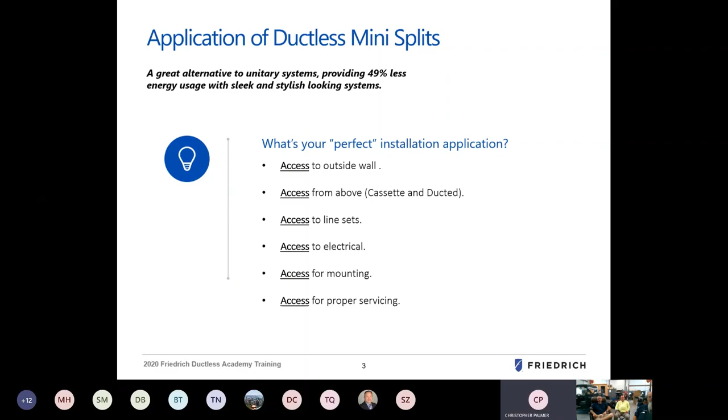Access and serviceability definitely matters. We all know from being in the field that things can add up to unforeseen costs, unforeseen service-related issues, and performance-related issues. All of that makes a difference.

So when you're planning your installation, make sure to have a good conversation with the customer about the expectations of the equipment, the understanding of what the customer is trying to accomplish with their cooling and heating needs, and the overall look and feel of the installation, plus future serviceability and maintenance.

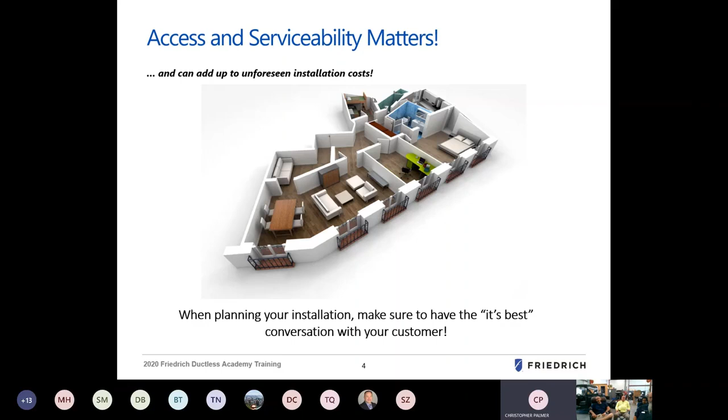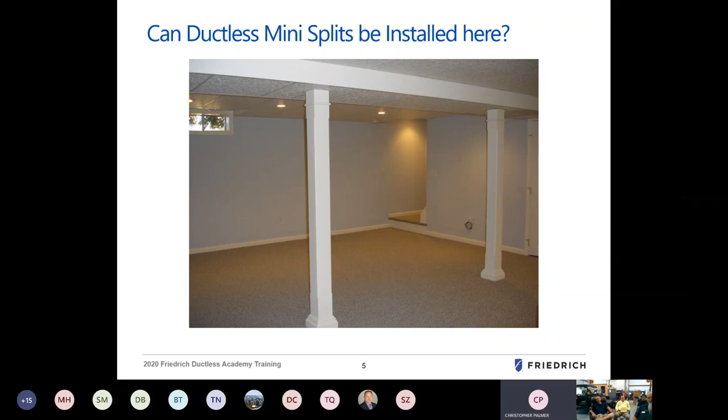Can ductless mini splits be installed here? This is a basement picture, finished room, trying to figure out what the best installation practice would be, and the best equipment to offer this customer. There may be a variety of different installation issues that come up from time to time and would be necessary to plan for this project appropriately.

System design is critical. Design is defined as the process of engineering an HVAC system. The ductless equipment is heavily focused on load calculations and equipment selection. So make sure that when you're looking at a project to design your ductless installation, all concepts from system concept, load calculations, Manual J, proper equipment selection, installing and using proper techniques with installation equipment, and adjusting, testing, and balancing are considered.

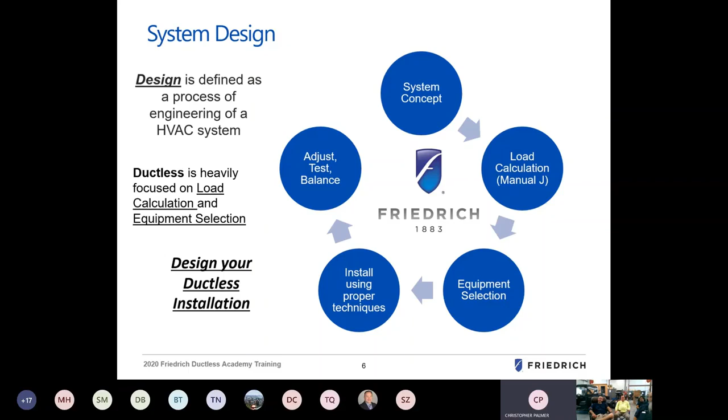Yes, there are some truths behind sizing charts. They're not just pretty pictures in a book. Similar design and build concepts apply - you're not going to build a 20-story building without properly engineering the building first and using the proper materials. Similar window design, window sizing and placement, similar insulation, if any, and similar layout. All of these concepts hold true today.

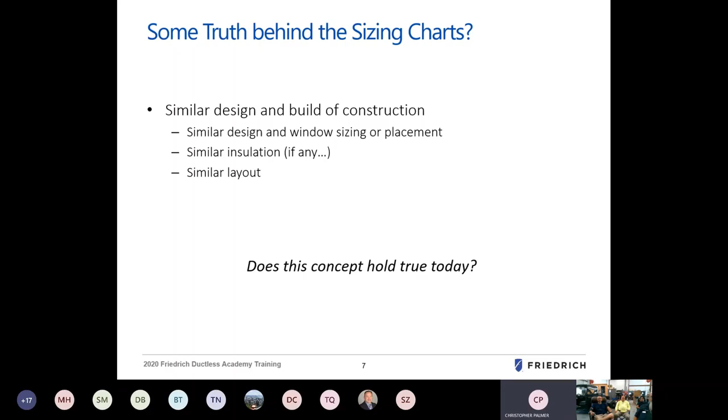ACCA Manual J - the importance of completing a Manual J is to determine the heat gain and heat loss of your specific application. No two applications are exactly the same, which is so true. Window panes, even the ratings over time, break down.

Calculations of the R value of the wall factor - a customer might have had a tree in their yard for 20 years, and all of a sudden a storm comes along and takes it down, and it changes the whole calibration of how the house is engineered now. They had that shaded covering for 20 years that actually did provide some cooling naturally from the environment, and now they don't have that, so their heat load goes way up.

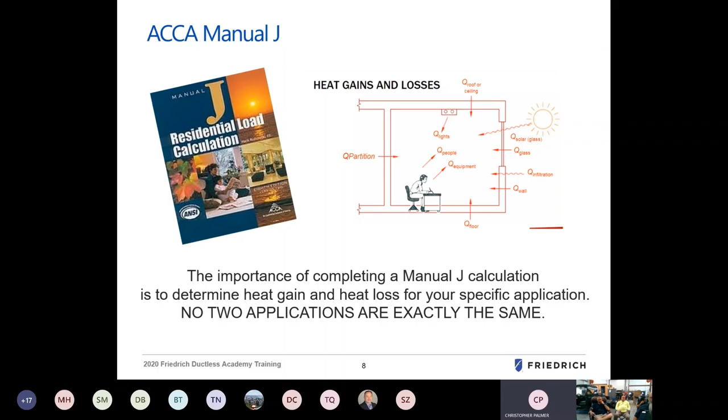So it's definitely important to do your proper calculations to determine your equipment sizing.

Clearance for Pro and Premier: we have a 5-inch clearance from the top of the unit with a 78-inch clearance from the bottom of the chassis once it's mounted on the wall. We're also looking for approximately 2 inches left to right from any obstructions, corner inlets, doorway openings, etc. And then 60 inches to the front, so that you're not putting this in some kind of nook and cranny and expecting the air to make its way around it.

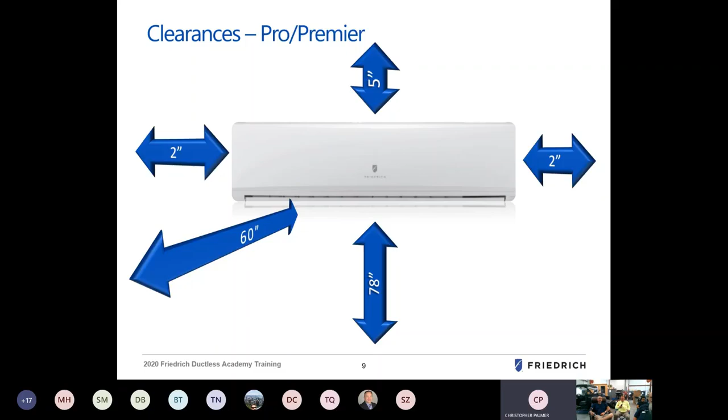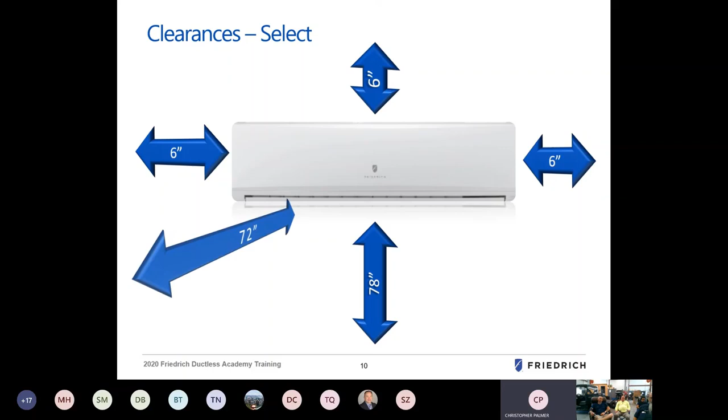Clearances again on the Select product would be 6 inches from the top, 78 inches from the bottom, 6 inches from either side, and then 72 inches to the front. You need a little bit more clearance on this particular model.

For example, wall penetrations - this is important. How often have we made it where the line set doesn't line up, or we have issues with the drain line? Making sure that the unit is properly pitched. So what we want to do is when you're drilling your holes, drill from inside to out. Once you get through the drywall or whatever wall surface material you have, if you drop your arbor down or angle your bit down, you should be able to create that nice slope to make sure that there's gravity feed on your condensate.

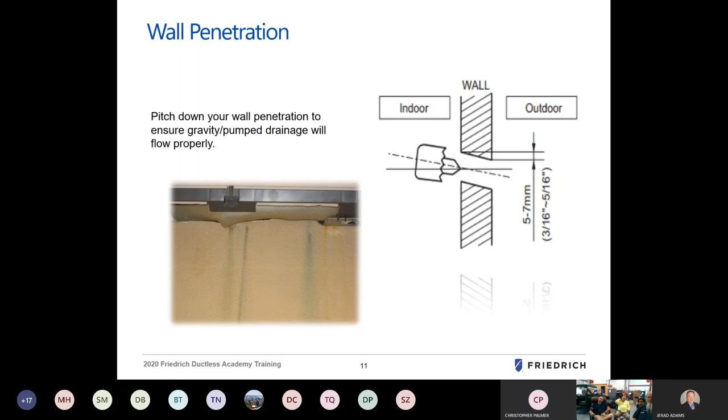You need clearances there to gain for service. Plus, you want to make sure that you're not blocking the discharge air coming off of the condensing portion. Shrubbery and things like that also does take into account restrictions. So we want to be mindful of the front space clearances, as that sometimes is important and overlooked in settings of specific application.

Clearances of select product: 20 inches to the top, 12 to the side, and more than 72 to the front end. Obviously, the more space around the equipment you can provide, the better off it is for you to make it easier for you to access it personally. You may not be the technician going back to service it, but you know that you stand a fighting chance that if you have room enough to work on it, any future service would be taken care of appropriately.

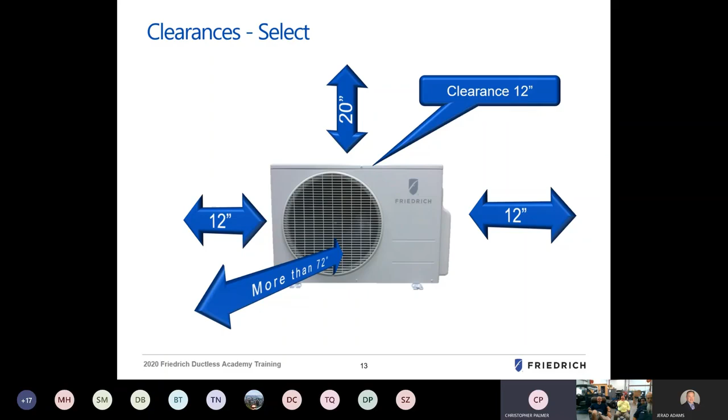Some of the tools of the trade. Essential tools for ductless installation. The big one is an orbital flaring tool.

Making key flares is critical in keeping the system charged properly, keeping contaminants out of the system, and making sure your line sets are connected appropriately. Often overlooked is the torque wrench, to make sure that the flare nuts are properly connected at those points of contact and that we have good, clean connections.

Deburring tool - some guys use a razor knife, some guys use a pocket knife, whatever. But a deburring tool makes sure the copper tubing is clean when we make those flares.

Vacuum pump, 2-stage or other appropriate vacuum pump, good for pulling down a vacuum, making sure that the system is clean before we charge the refrigerant. Micron gauge, once again, as a refrigeration tool, making sure that we have a good, clean circuit refrigeration system and that the system is as clean and as free of contaminants as possible.

And a good manifold gauge, whether you use a digital gauge or the standard analog type, making sure that you have good, clean hoses and that you're not contaminating the potential system with any undue components.

And then a digital refrigerant scale. Fish scale, bathroom scale, all of that stuff should be out the window by now in the conversation - to properly charge, add refrigerant, and remove refrigerant from a system, you need a nice, good working scale to make sure that those charges and refrigerant measurements are accurate.

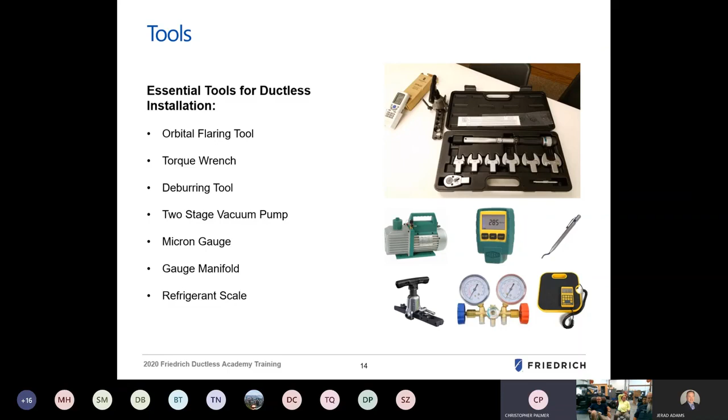Line sets - making sure that both line sets... some guys will run their own line sets, so they'll get strips of rolls of copper and then they'll get the bare Armaflex or insulation and make up their own. That's a fine practice. Sets are often purchased with equipment already pre-done up for you.

The idea here is that you want to make your own flares to verify that you make good, clean connections. How oftentimes in the field have we purchased a pre-flared line set from a supplier and got to the job site and the flares or the copper was a little thin and the flare didn't hold, or it just didn't meet your specific specifications. So it's a nice thing to do to get your line set ready and make your own flares to make sure that you feel good about the connections you've made.

The power and communication wire - this is always a debatable idea about what wire I can use. In our literature, we recommend 600 volt rated wire, 14 gauge, 4-wire. That's 3 conductors and 1 ground. Do not intend to use the ground wire as one of your communication legs or power legs. That is so often a mistake.

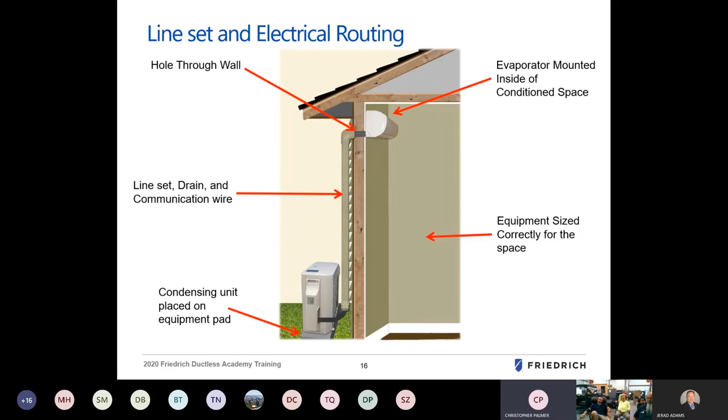Making sure that both copper lines are insulated. If you haven't insulated the refrigeration lines correctly, you might get some sweating. Sweating might lead to biological growth or discoloration of the wall, or some other leaking inside the sheetrock, and could create other building system issues. So make sure those lines are nicely neat, clean, and insulated.

And also make sure you can run the communication wire along with the line set, and that doesn't have to be run separately.

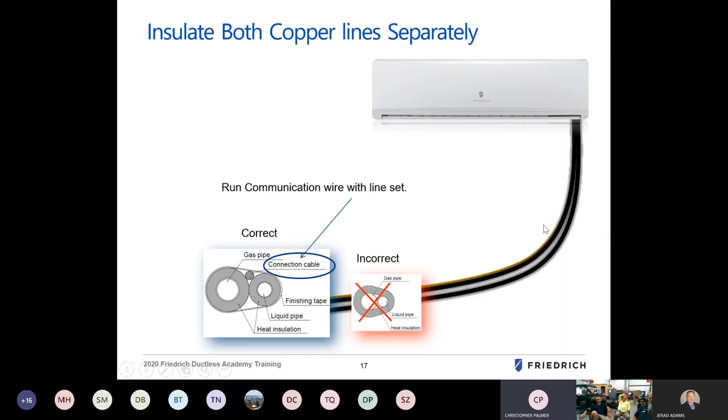Evaluating the length of line on the fittings, yes, 90s and bends do create extra length. For example, a half inch 90, you would subtract a one foot length from your total line set. This is important in trying to calculate the proper charge of the equipment, making sure that once you meet the minimum footage of the equipment, you need to add additional refrigerant. Knowing the number of counts and the size of the 90s will certainly help ensure you have the accurate charge of the system and how much additional refrigerant may have to be added.

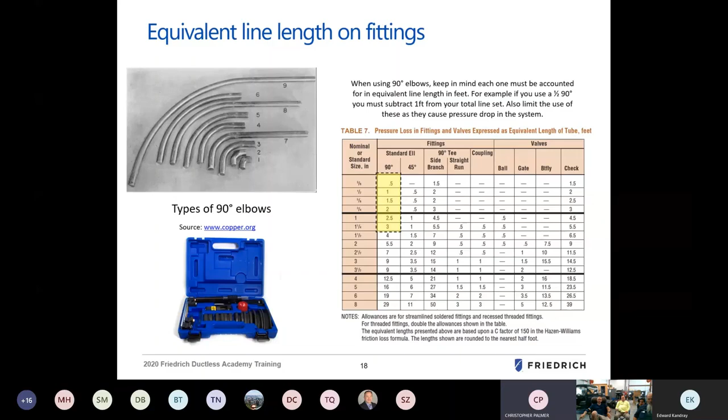Yes, the rubber plugs. This is a common thing, where we put the lines together using the factory flares provided by the line set manufacturer instead of our own flares, and we forget to take these little plugs out. The purpose of the plugs is just to keep contaminants from getting into the copper. We put these nuts over the fittings, and then this rubber gets stuck inside the joints, clogging the system and creating a multitude of problems.

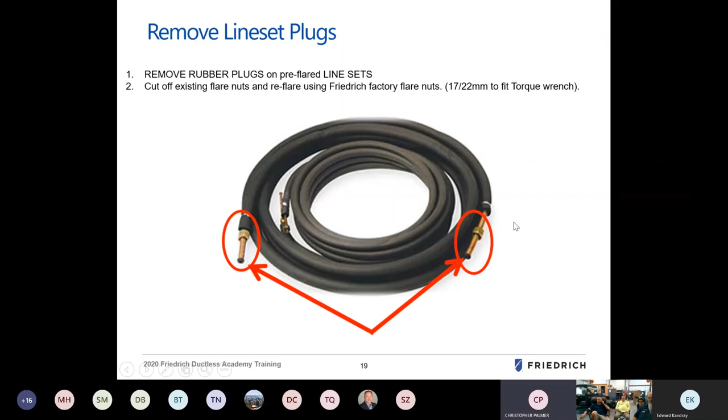So make sure that we keep that copper nice and clean. And like I always recommend, cut and re-flare the lines to make sure my flares are done the right way, and to prevent things like this.

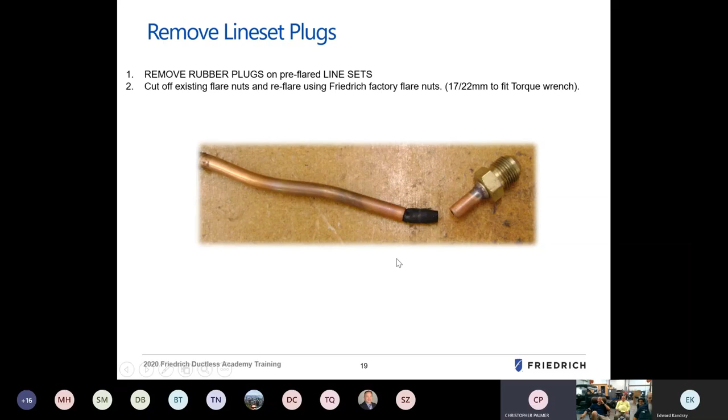This plug was jammed past the fitting and almost got drawn into the equipment. Never a good sign, never a good fix, kind of a pain to deal with once you figure it out.

Down to drainage. We've got condensate leaking out of the bottom. No traps, code issue. Use an open standpipe like a washing machine drain or a fully vented trap, making sure you have the right pitch.

Notice here, this is the bottom of the line, and the drain pipe is actually higher than where it needs to be. This needs to be a little lower, towards the bottom base of the unit. So if you have to snake this up and over, there's a good chance it's going to clog here, or not drain properly at all, and you're going to immediately back up the water.

The drain pan is very shallow in all ductless products, so any little bit of sediment, slime, or lack of proper pitch is going to cause that water to back up very quickly, so we want to be mindful of that. Once the water runs out of the building and away, it shouldn't affect anything, and gravity takes over so the water is discharged naturally to the environment. That's a critical measurement, maintaining proper pitch on the drain line as it exits the building.

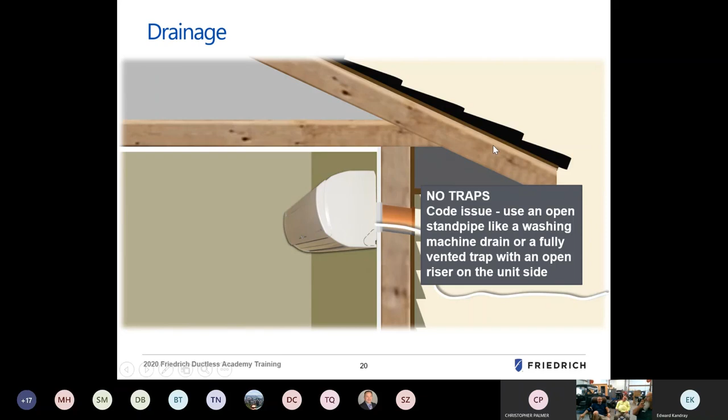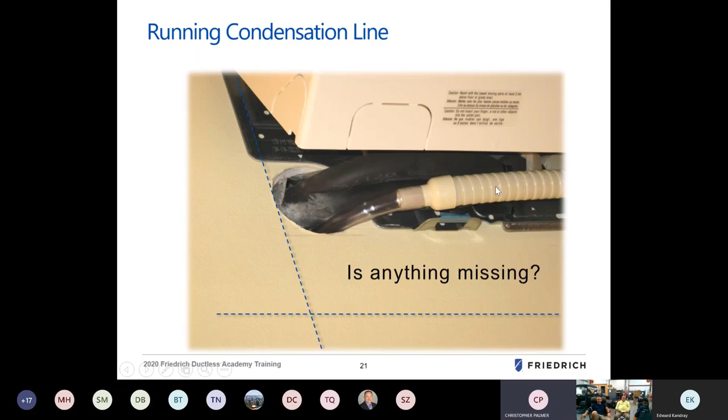Got a vinyl drain tube here in this image. There's no clamp here, no sealant of any kind used. It's just plugged right onto that piece and could easily dislodge and create an open drain into the wall or down onto the floor.

Making sure that we keep the drain line nice and clean. We see here that it starts and then goes up and over the line set. That creates a little bit of a pocket, and water will collect in that area, especially on a horizontal run, since we've now created a vertical rise in the drain pipe. We want to make sure this drain pipe stays below everything else on the bottom so the water has a chance to run down naturally.

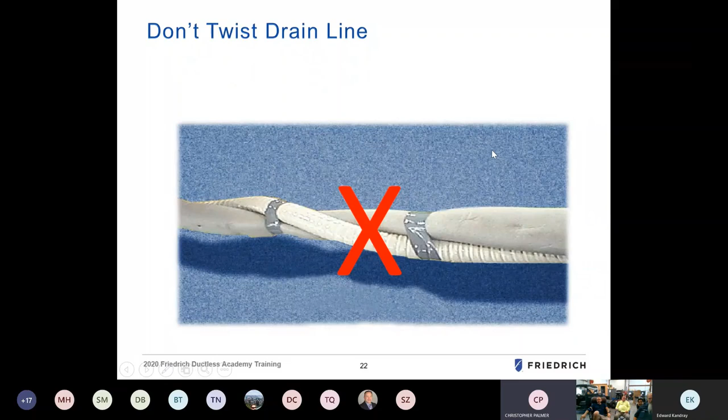Never use filter dryers or sight glasses on an inverter type system. That's not a true statement in the fact that we don't want to use them on ductless systems. Inverter systems, when it comes to unitary products, do require filter dryers and other components, although sight glasses are debatable - but that's for another training day. None of these items should ever be used with a ductless system.

And for this reason alone, besides other related issues, it will cause a pressure drop in the system and potential restrictions. Remember, the line sets are saturation lines, not your typical warm liquid and cold suction lines - they're both cold at different points of expansion. So we don't want to create any kind of restrictions. We want to make sure we have nice, clean, dry refrigeration lines.

So removing the plugs, good flares, and we're getting to pressure tests and nitrogen charging here in a minute. But we're making sure that the refrigeration lines are clean, well run, secure, and insulated.

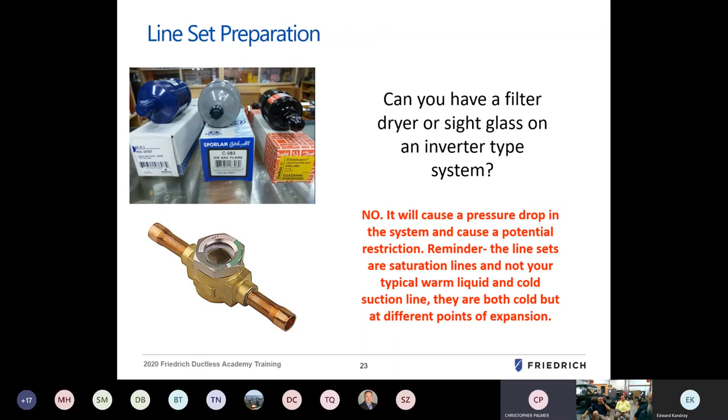Good flares - can't speak on this enough. Making sure that we have a good cone, 45-degree cone. We send in a package with our manual and remote a set of our own flare nuts. You can use the factory flare nuts, which is preferred, making a nice clean connection with a nice clean flaring tool, working clean, working tight, and making sure that refrigeration system is nice and clean, keeping free of contaminants, secure, and pressurized at all times.

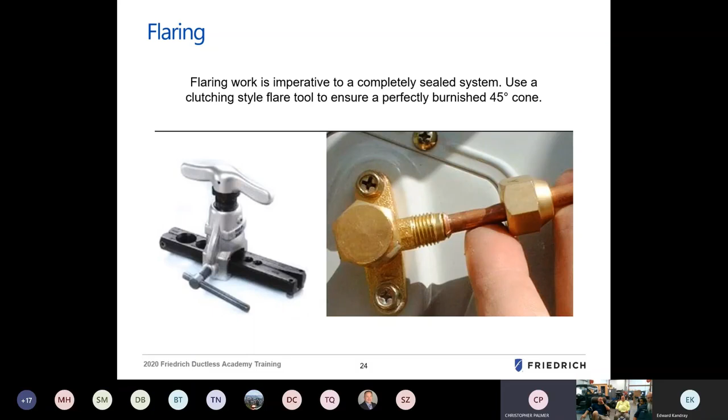Just an example of how to deburr a pipe and then properly flare with a flaring tool, making sure that the flare nut is put on before you flare. It's funny how oftentimes you do a nice flare and then realize you forgot to put the nut on, or put it on backwards, so you have to cut the pipe again and attempt another good flare. Although it's good practice at the apprentice level - we laugh at ourselves and have to do it over again - making a nice clean flare is critical in connecting the two components and making sure everything comes out the way we expect it to.

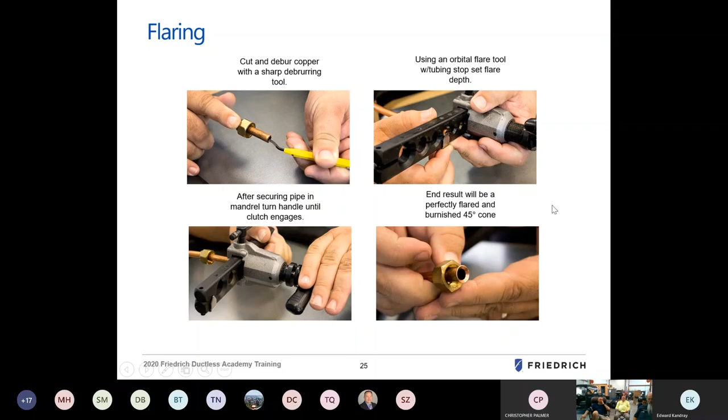If you see here close up, that's a nice clean flare against the head of the valve just below that top brass bevel. That's going to ensure that when we squeeze that nut down over the threads, it's actually going to compress that flare a little bit into the brass, and it's going to seat nice and flush, creating that nice pressure tight seal.

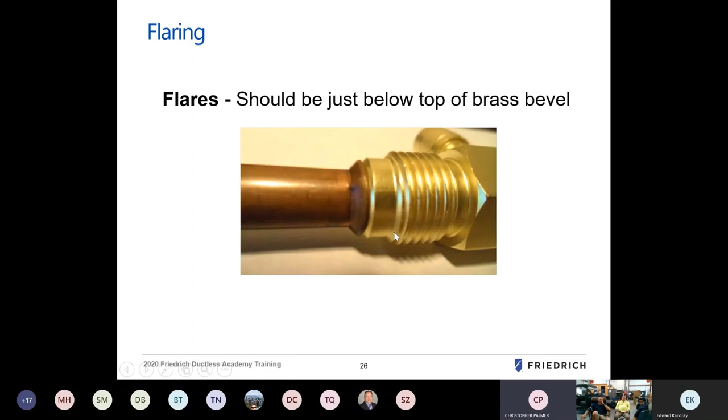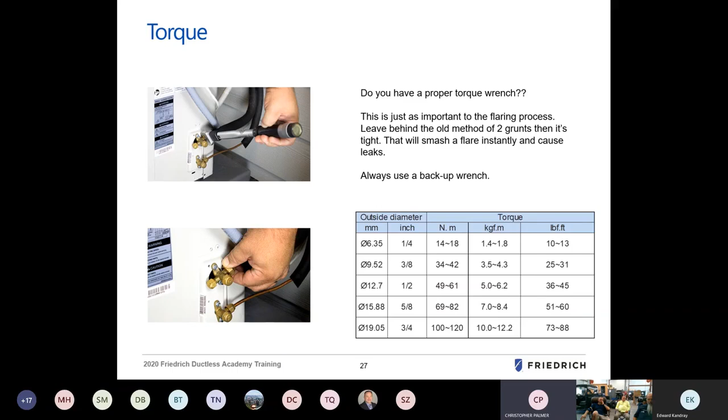Then using our properly rated torque wrenches, we're going to make sure those nuts are nice and tight, following the specified torque settings, using a backup wrench - whether a properly sized box wrench or an adjustable monkey wrench, so to speak. The two grunt method, the old popular squeeze-it-until-your-palms-hurt scenario, is not necessary. We want to make sure we're using proper tools and meeting the proper torque settings for all the different connections. Depending on the size of the pipe, you don't want to over tighten those joints and possibly crack and damage those flares or the valve.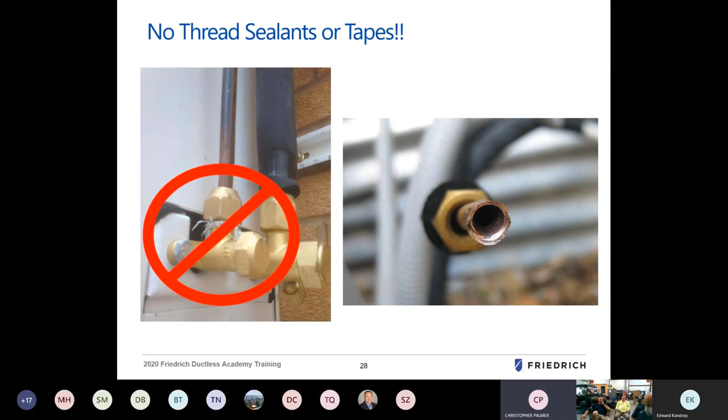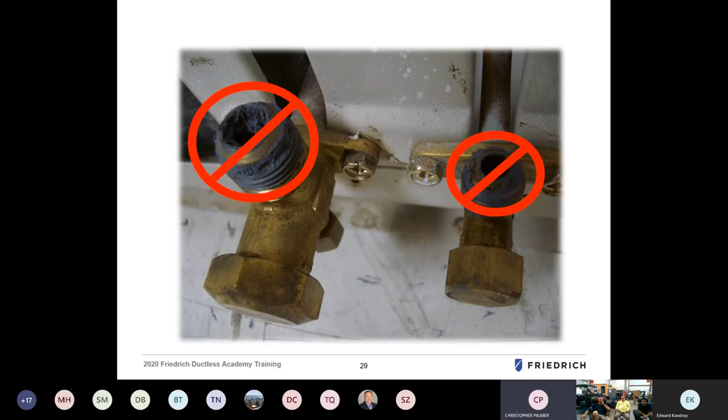If you've got to put plumber's putty or Teflon tape or some kind of goo on there to make sure those are sealed and tight, that's a no-no. You want to make sure you're not caught doing that, because all of that material could get into the pipe, into the refrigeration system, creating headaches down the road. It could create restrictions, get into the compressor oil, get into the valves, creating refrigeration nightmares for the equipment, for you, and for your customer.

We don't want to do any brazing work. Flares don't require any solder, brazing, or anything like that. You don't have to weld on these valves. You don't want to melt the equipment. None of that is necessary with ductless equipment.

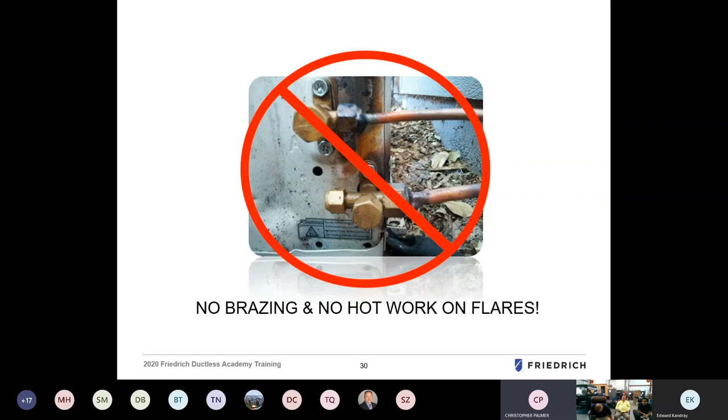Now to the all-important nitrogen test. Once we think we have good clean flares and our lines are nice and tight, we want to pressurize them. Rather than using the expensive and environmentally contaminating refrigerant, we use nitrogen. A good high pressure test will confirm we don't have any leaks and that we're ready for charging the system. Pressure testing at 550, 600 PSI is recommended.

We can use soap bubbles to verify if there are any leaks in the valves or system, making sure our line set connections are secured. Make sure you hold it for a minimum of 30 minutes or more, then discharge the nitrogen appropriately, and run your vacuum pump to draw down the system, making sure it's nice and clean, ready for refrigerant.

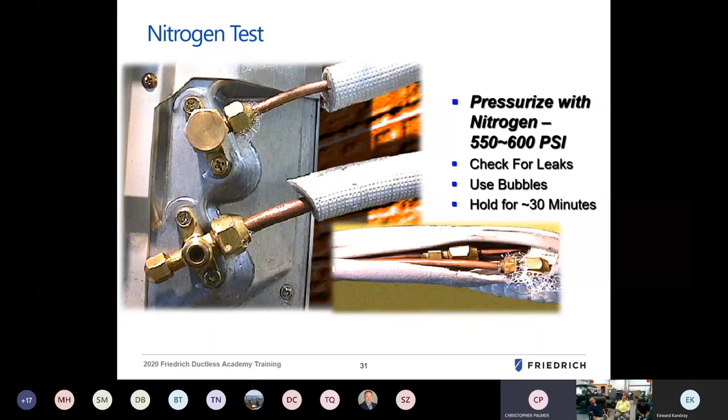Why is the nitrogen test at 550 and 600 PSI important? Micro leaks are common, especially in flare joints, and they're very difficult to see at anything lower.

We had an example where our technical assistance center received a call where the contractor left 350 PSI in the system for over a month, then commissioned the system and it ran for 3 months. The same contractor received a call that the customer said the system was no longer cooling. Upon inspection, oil was found at a flare joint and the system had no charge to recover. So obviously there was a major leak there, and 350 PSI was not enough static pressure to overcome the micro leak. But once the system was running, the charge pushed the oil and everything out through the faulty flare, resulting in the service call and ultimately a call for warranty.

So that's a good example of why the extra pressure to test at a high nitrogen level is important in identifying any of those micro leaks within the system.

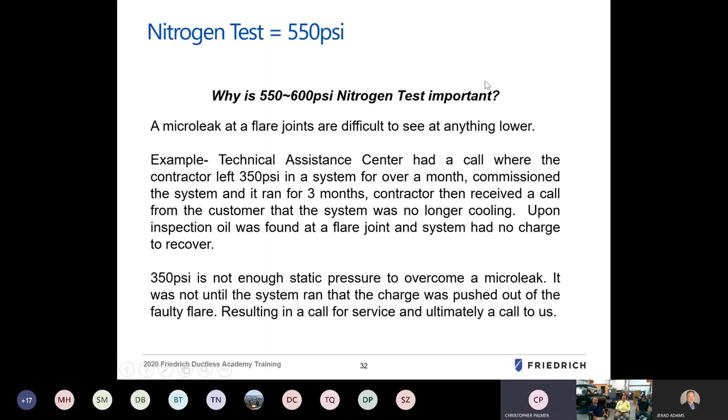Proper flaring techniques, as we went over before: good flares should hold and sometimes exceed 550 PSI. A good cone, with only 6 small threads holding anything back - that little piece of copper and brass is all you've got, making sure the refrigerant stays in the system. That's all that's holding it together, so we want to make sure everything's clean and tight and ready to go.

Flaring is imperative, as gone over again and again. It must completely seal the system. A clutching flaring tool is the proper tool to use. Different flaring tool equipment is out there, and you can choose what you're comfortable with, but make sure you have a perfectly burnished 45-degree cone, and good, clean flare nuts with good, clean threads. This ensures the line sets are done correctly and that your system will be ready to go and give you no problems once you commission the equipment.

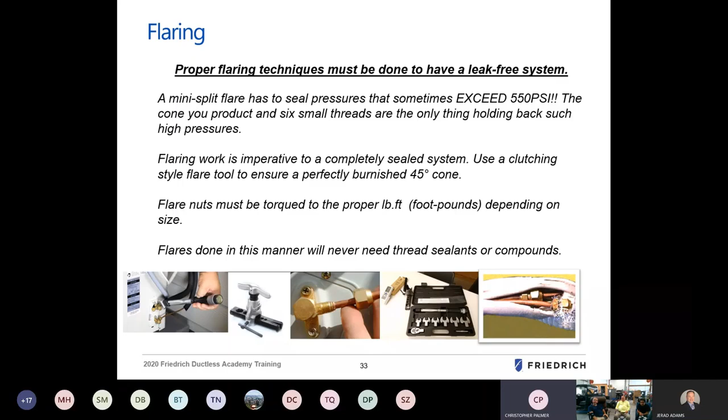Flares done in this manner will not require any sealants, thread compounds, or anything like that. So take your time on the flare, focus on that, make sure you have good connections, and you'll be ready to go and ready to roll.

Wiring connections: 1, 2, 3, and G. Various labels and nomenclature may be used - you may see letters like L, N, S for signal, and G. There may be a variety of other nomenclatures used in the industry for specific wiring landing positions.

You can color code each wire: 1 is black, 2 is red, 3 whatever you use - black, white, red, green always as ground. In some instances, you may not be using those color-coded wires.

You may have a brown wire in there, or a yellow with a stripe. Make sure you correspond the proper terminals with the proper landing spots of the other wire.

Oftentimes you'll install a unit, power it up, and get no response from the equipment. There's a good chance your landing spots for the wires are incorrect. Go back, start fresh, and look over your wiring connections to make sure everything is landed properly, and that you have the proper supply voltage, running your 208, 230 volt or your 115, 120 volt equipment powered and wired appropriately.

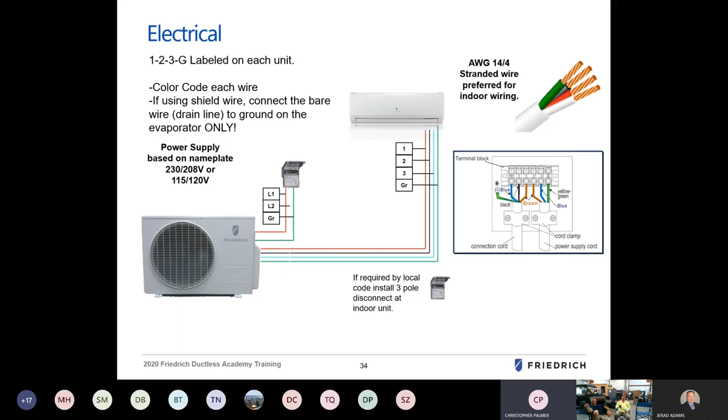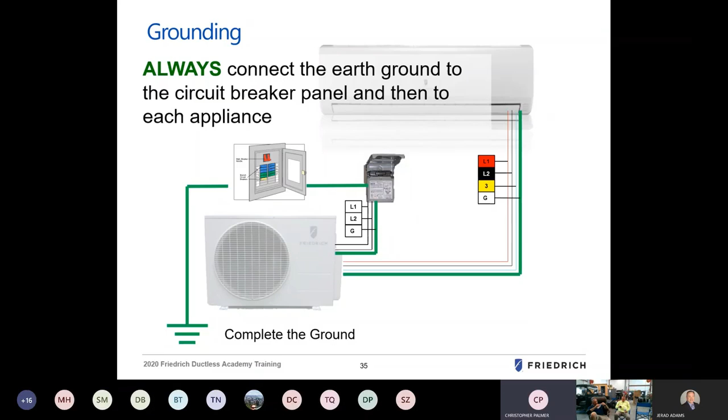As always, a good ground from panel to disconnect to equipment to head unit is critical in making sure the appliance has a good earth ground and that the equipment is grounded throughout the entire system. In some cases you may have to drive your own ground rod if there's none, or if there's not a good ground within reach of the equipment, as a good ground is essential for the printed circuit board to stay free of harsh EMI or RFI signals.

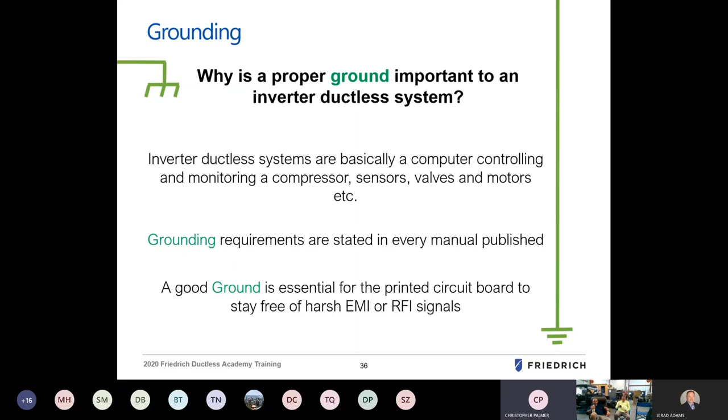Grounding requirements are stated in every manual published, not just Friedrich's. So get in the habit of making sure you run good grounds and all your wiring connections are nice and clean and tight. Similar to stressing the importance of how the refrigeration piping should be done, good clean wiring connections and a clean system will ensure that your system is going to be ready when the customer needs it and when you complete the installation. Here's an example of a ground rod.

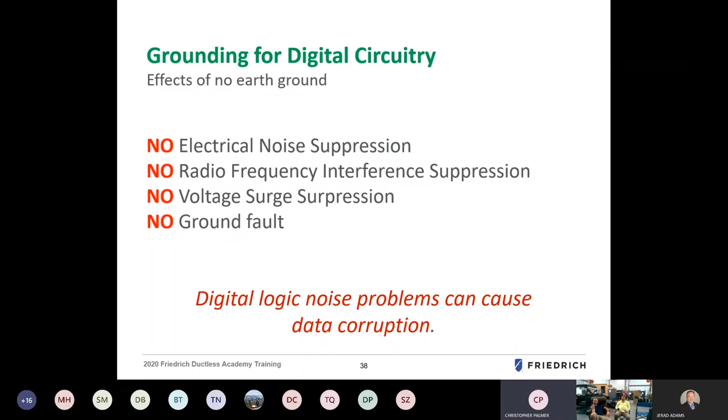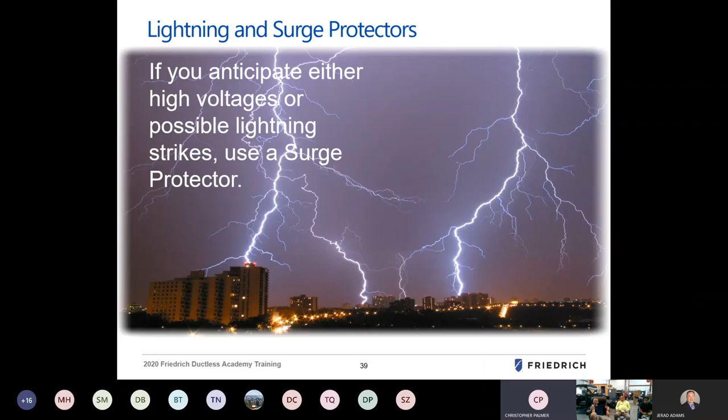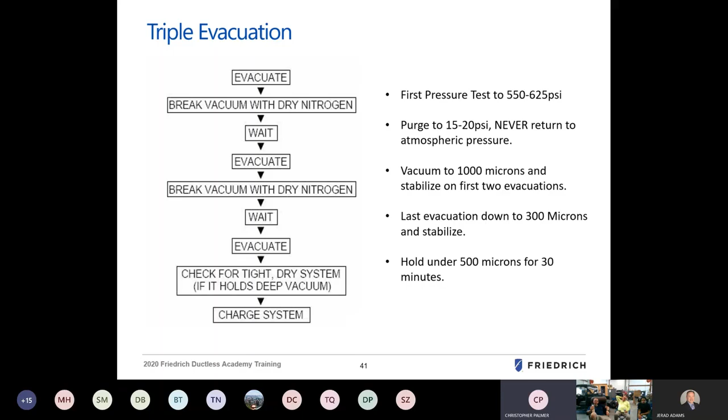Then follow with more vacuum with two additional evacuations, and then hold the vacuum down to 300 microns until it stabilizes, or hold under 500 microns for at least 30 minutes. Now you've ensured yourself and the equipment that you have a good clean system, and you've done all you can to help ensure this installation and startup is going to go well, and then you're ready to charge your refrigerant.

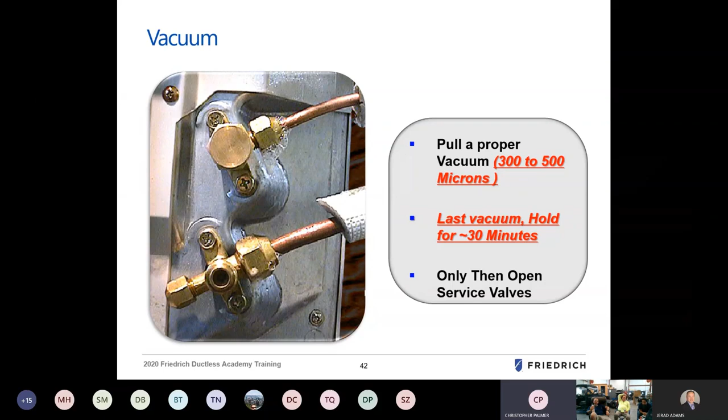Vacuum test: you can check for bubbles to see if you have any leaks under a vacuum. If you lose the vacuum or notice any bubbles, you're going to have problems and you'll want to revisit your nitrogen pressure testing process.

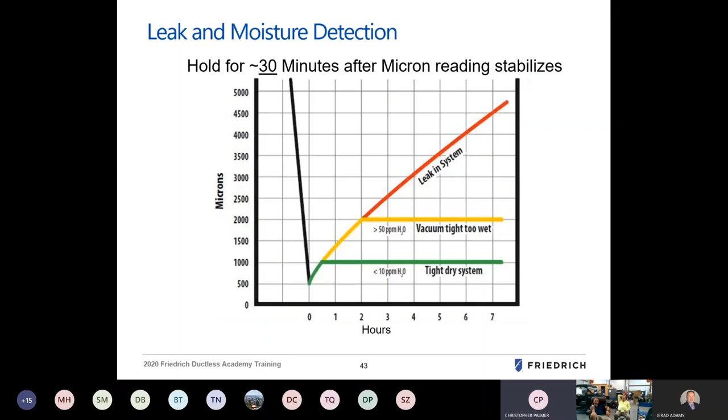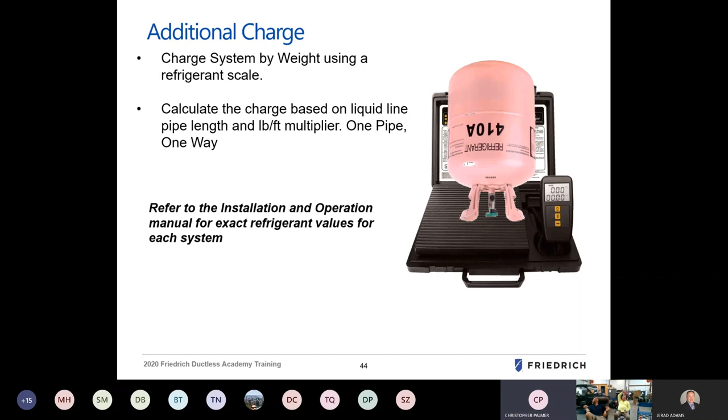Quick example: if you have a 40-foot pipe and the system is based off a 25-foot run, you have to account for an additional 15 feet. Whatever the chart scale is for that model number, you'd add 15 feet times whatever the rate value is for that system—sometimes it's 0.22 or whatever the consideration is for that model. You multiply that amount of refrigerant times the number of feet, and that gives you how many extra ounces or pounds of refrigerant you need to add to that system.

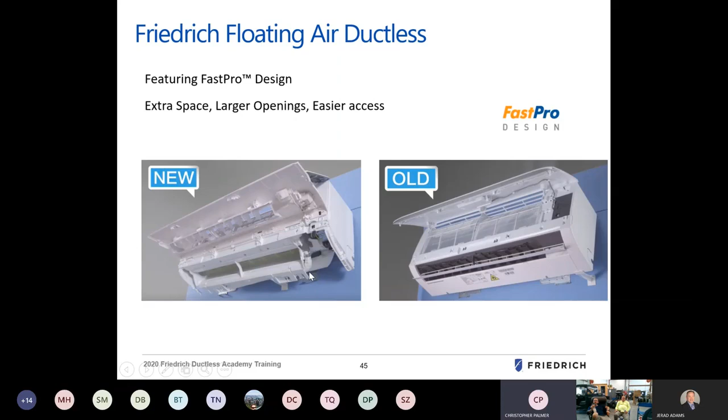The next slide shows how it's much faster to install. We can reach the line sets here, we can have the wiring connections here, all without that plastic in the way. We don't have to prop up the head and stick a block of wood under there. We get good access with all of that open underneath.

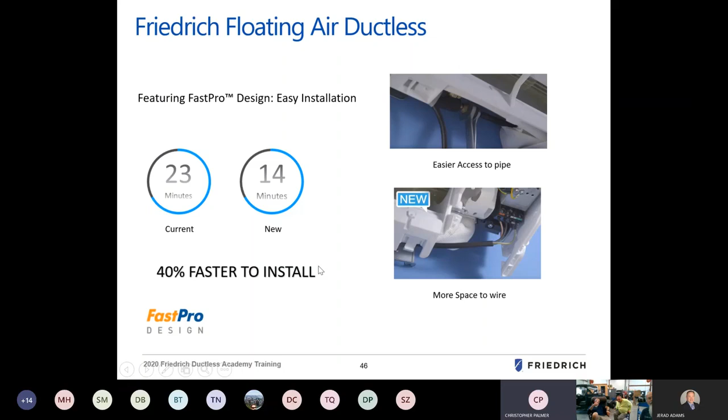The estimated time to install the new head design is 14 minutes compared to the old style of 23 minutes—roughly 40% faster to install. It gives you more space to work.

It's 45% faster to clean as well, roughly, having to take everything apart, wipe all the vanes down, clean everything, take the cover off in some cases, remove the lid, the panel, the washable components.

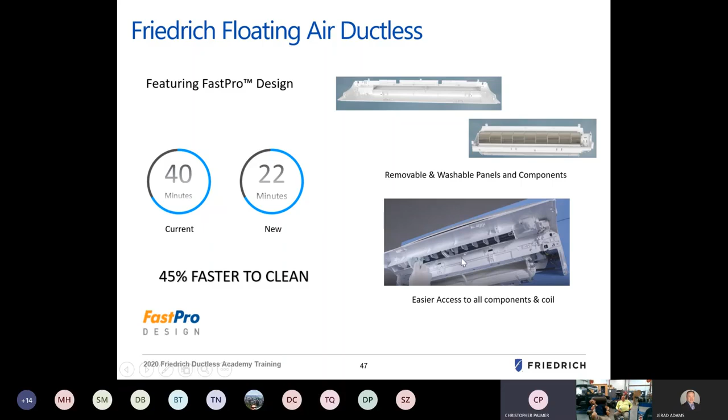It gives you access to all the vanes underneath and the ability to remove the bottom chassis—all of that comes apart. If you had to replace any electrical components under here, remove the blower motor, repair the drain line, or repair any of the tubing underneath, it gives you full access and can cut that time down by about 50%.

The cradle, which encompasses the drain pan, the blower wheel, the blower motor, and the drain line, also removes and gives you access to the evaporator coil for cleaning on the backside and underneath, making this a fully serviceable Floating Air ductless unit.